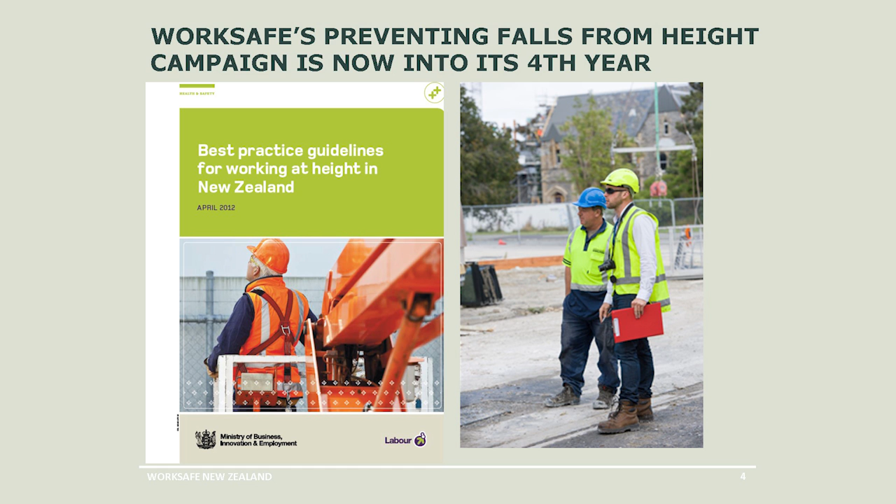So just a little bit of brief on why we are here and how we came to be. The Falls from Heights campaign is now in its 4th year. You're aware that there's a Falls from Heights campaign that's been running? Excellent. And some perceive this as a focus in the residential sector and a good way to shake up builders, and I assure you it's not.

With the creation of WorkSafe and leading into that, the strategies around what is causing serious harm, what is causing serious deaths actually, and what can we do about it? And it stood out quite literally that people falling off stuff in construction, especially under the 3 metres, and I'm sure you're all very aware of the history, but that history and that message has been very current for the past couple of years, and scaffolding and edge protection seems to be one of the preferred controls for these safe working at heights.

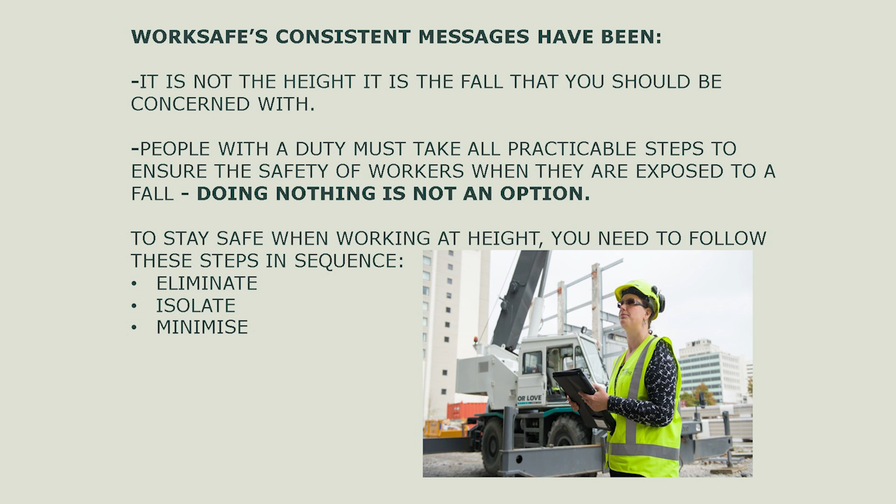No longer is it acceptable to say I'm wearing a harness and a harness system that is inappropriate. The emphasis is not on getting scaffolding. No one's telling you to get scaffolding. That's not the point at all. The emphasis is on, can you eliminate this harm? Can you isolate the risk and the hazard? And if not, can you minimise? Hang on. Go back to that isolate again.

And the preferred method of isolate, guardrails and scaffolding seems to speak for itself, and we're talking countrywide. This is a catalyst. There's some really good examples of good practice going on in the city. There is so much going on in the city, but I assure you this is reflected nationally, which is another reason as to why we brought our inspectors here. So let's go back to that isolate as to how you're controlling these hazards.

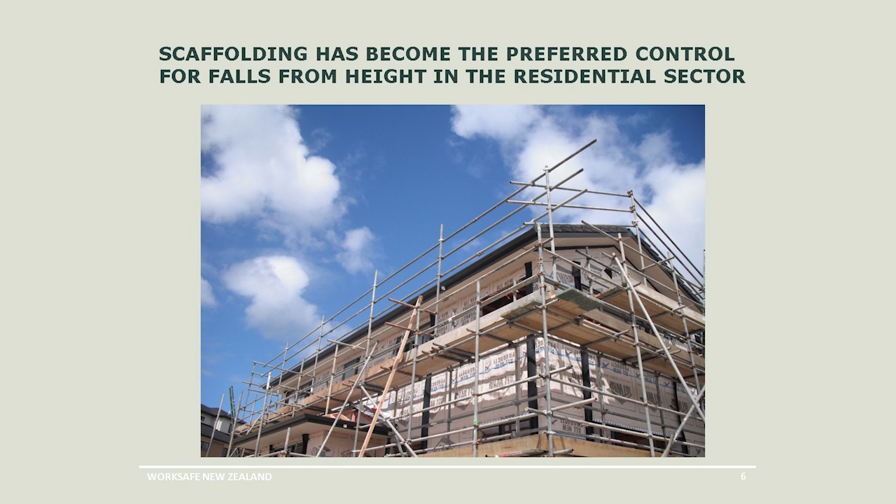I'm going to speak briefly on the responsibilities of the scaffolding supplier and then the responsibilities of those scaffold workers. And it's not just scaffolding, sorry for using that word, this is edge protection, guard railing. So we fit under that same umbrella. And hopefully at the end of this evening too, you'll get clarity on some of these grey areas in between what is scaffolding, what is guard railing, what is 25 degrees, what can I do, can I still wear a harness in some instances.

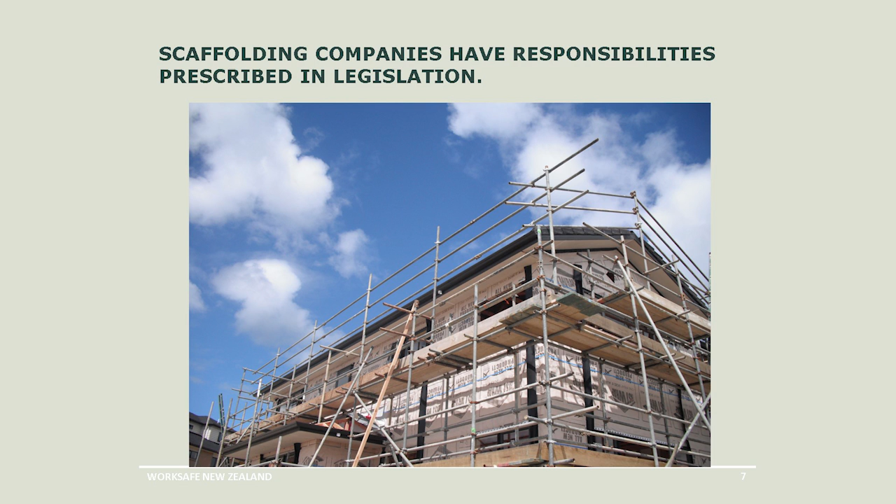Scaffolding and working at height is slightly unique in the sense that it's a trade or an industry that's regulated. So it's mentioned in the Act. Now that doesn't mean that if you're a scaffolding company or working at heights, you've got more responsibility under the Act. It's just those responsibilities are emphasised.

And you may want to know, and I should have checked this with Evgeny first because this might be an inside trade secret, but when our inspectors are talking to you about is that scaffold in good nick, generally they shouldn't be saying you need more planks on that, the handrail's the wrong height, or the distance off the wall's too far, because it should be linked back to the sections or the regulations of the Health and Safety in Employment Act. And this is quite literally one of them we use quite commonly, and it's a basic statement.

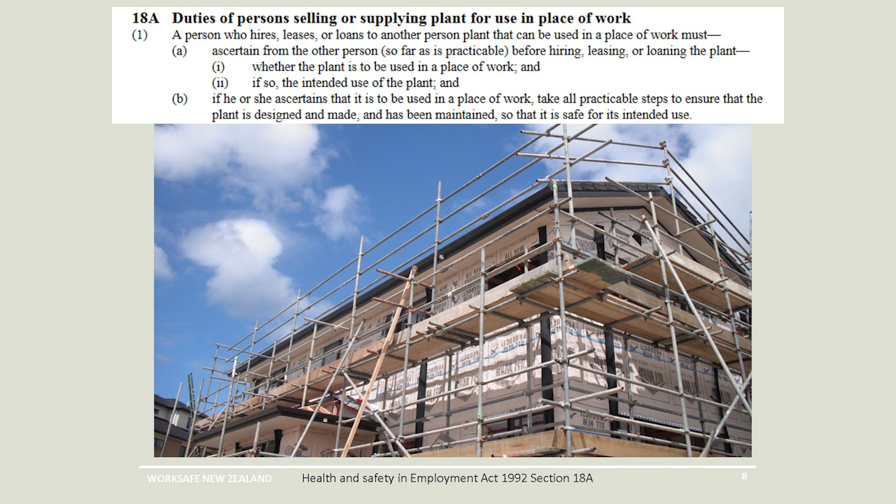Can you get that? I know it's a cut and paste, but pretty much if you're supplying plant or material to someone on a construction site, you need to make sure that that's in good nick, that it's right for the job, and the person using it understands it. And that's black and white legislation, and whether you know the legislation or not, you might be familiar with terms from the best practice guidelines. So taking the best practice guidelines, now interpretation of that actual section of the Act.

So just to reiterate, you're not going to be jumped on for not having sole boards under your standards when you should have sole boards under your standards, or your kick boards not in place. You're going to be challenged under the fact that you've supplied something. There's clear industry guidance on how it should be supplied, and we think you should be doing a better job of it.

The best practice guidelines for scaffolding interpret that message as you must develop a clear understanding of what's required. And that may even mean a communication to the person who's paying you, of course, because that's your main responsibility, but also the fact that the build changes on a daily, weekly basis, and that other trades may also need to use that. I'm forever getting phone calls from the Roofing Association, the poor bricklayers and the fascia guy. He whinges about that fascia guy.

So I'm getting phone calls from those guys about, hey, hang on, at the planning stage, a lot of these issues could have probably been ironed out given the responsibility to alter the scaffold fit for purpose and such. I'm not saying if you've been asked to build a scaffold for exterior cladding, we're going to force you to build a scaffold for the chimney out of masonry stone. That's not it at all. You build the scaffold for the contract, but you need to take into account that other trades might be using it, and those responsibilities are there in the communication stage with the principal.

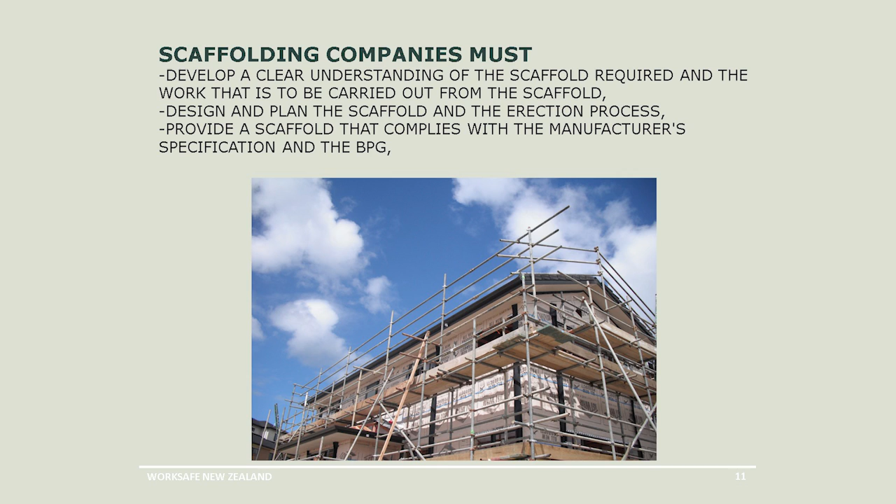Providing a scaffold that meets the manufacturer's specifications and the best practice guidelines. And so that's about the industry's expectations. You're familiar with the best practice guidelines in scaffolding, the best practice guidelines for roofing and such? Good as gold. They're industry created documents, and I think it's important that you're aware of them. We do endorse the practices, but they're not written by WorkSafe, and they shouldn't be. They're written by the industry, and it's industry's expectations on what safe looks like. So it's quite important that you're familiar with that or working towards that.

And the other good thing about it is it's what our inspectors carry. If you want to know what our inspectors are thinking, refer to the best practice guidelines, because we should be referring to what industry's expectations are. So we also use those best practice guidelines to measure and gauge what's going on.

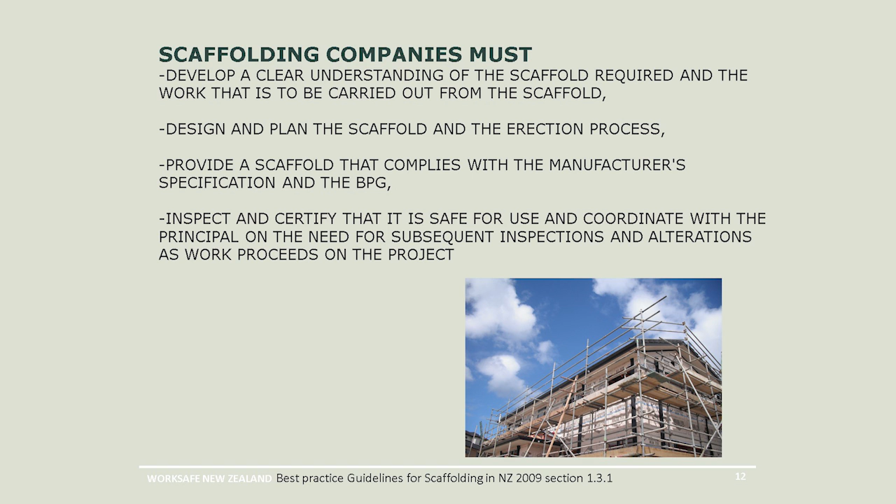Inspect it and make sure it's in good condition. Now, I know there's some grey areas in and around this 5 metres and who should tag and who can. I'm happy to clarify those or put our point across, but regardless of height, residential, 5 metres or over, scaffolding needs to be in good nick and maintained in good nick, and it's your responsibility, unless, of course, you've handed over that responsibility. You need to ensure that once the scaffold's been built, it's safe and compliant, and when you leave it, safe and compliant, by whatever means, and ensure that there's a process there.

Now, this scaffold could be there for 1 month, it could be there for 1 week, and it could be used by different trades, so whatever process you're going through, regardless of height, when a user uses it, they know it's safe. When an alteration happens, they know it's safe. And just as importantly, but least importantly, when an inspector comes across it, they know it's been put in a safe condition.

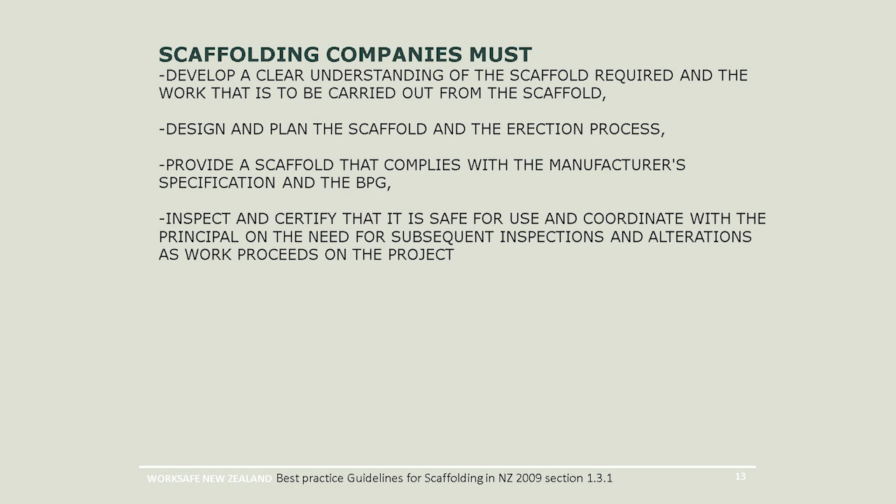No worries with that. These are from the best practice guidelines, and just reiterating that under the Act, scaffolding and working at height is mentioned, and this is the interpretation through the industry best practice guidelines. Cool. So scaffolders must. Now, what I've taken here is Regulation 35 out of the Health and Safety in Employment Act. So this is black and white.

This is specific to getting a certificate of competence. Now, if you're going to get a certificate of competence, these are the sort of traits you should demonstrate. But at the same time, these are the sorts of measures we apply to anyone building a scaffold. Okay? Scaffolders must have a thorough knowledge of scaffolding. That sort of makes sense, doesn't it?

Yeah. We're happy to guide. Absolutely happy to guide. Some of our inspectors aren't experts, and they don't need to be experts. They know the general principles. They know the dog's balls of what looks safe. They're happy to share what we're thinking. But at the end of the day, the expectation is on you to have that knowledge of the scaffolding.

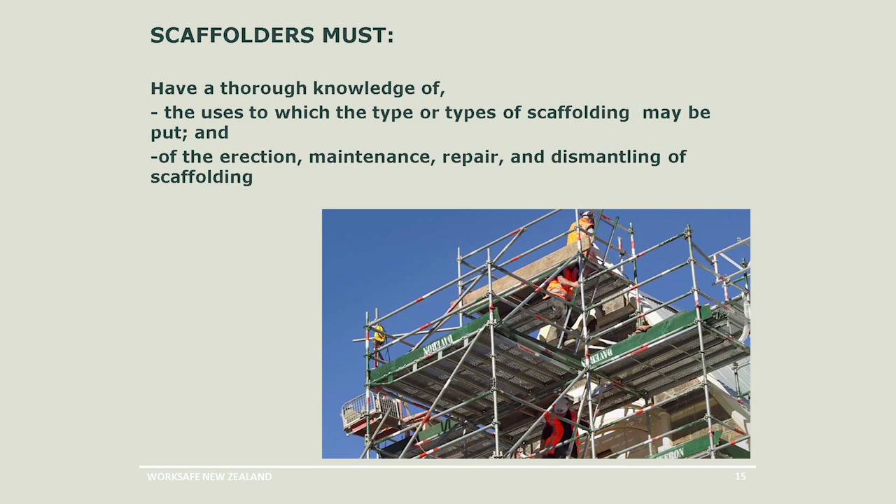The scaffolding company, the scaffolder, the team leader, the person taking responsibility for that build, must have a clear understanding of the erection process, the maintenance process, and of course the dismantling of a scaffold, and the practices, so safe work methods.

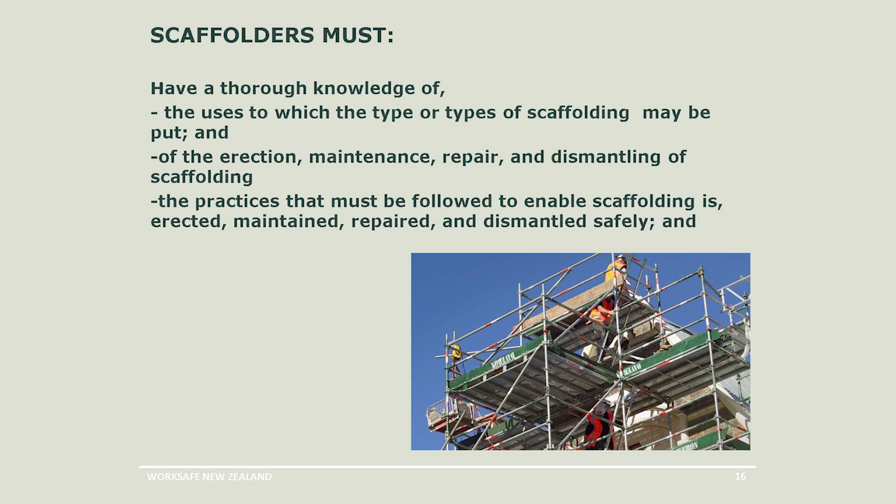And it's an interesting position I have now, because I'm privy to all sorts of groups and stuff, and as a scaffolder it was like everyone else's fault, you know, I'm a scaffolder, mate, that's how it is. But it seems to be now that we get this Falls from Heights campaign, there's greater awareness of the concerns and the harms, the social factors involved in an accident, the greater efficiencies and productivities of having a good scaffold or working from behind a rail.

You know, the Roofing Association is just wagging their tail about this whole campaign because it now means that roofers are working more efficiently. I don't know if they work happier, but they are a happy bunch. But instead of having harnesses that weren't really tied to anything, and doing courses that really didn't help them in the job they're doing, they've now got rails around them and even better ladders and platforms and stuff. So there's been some really good energy behind this campaign and this focus.

So it's a bit disappointing when, and present company excluded, of course, I know he's here, when builders ring up and say, you know what, I took your advice and I invested a few thousand dollars in getting a scaffolding company in, and it's brilliant, it's well worth it. My boys love it. In fact, for the next build, we're going to factor it in. But I'm a bit concerned that the things we can't do, like walk the top plate or walk the trusses or climb purlins, these scaffolders are doing that.

What's that about? Now, our main emphasis is quite literally, let's get some scaffolding and edge protection or better systems in place. And we've still got a lot of work to do in that place. Should we really be coming back and talking to the industry whose responsibility it is to make that happen, and say, look, how are you guys working? What are you guys doing about it? It's not a good look and it's not a good fit, but the expectation is scaffolders should be able to, from very low to very high, keep themselves and their team safe and demonstrate good practice and work as tradesmen or tradeswomen.

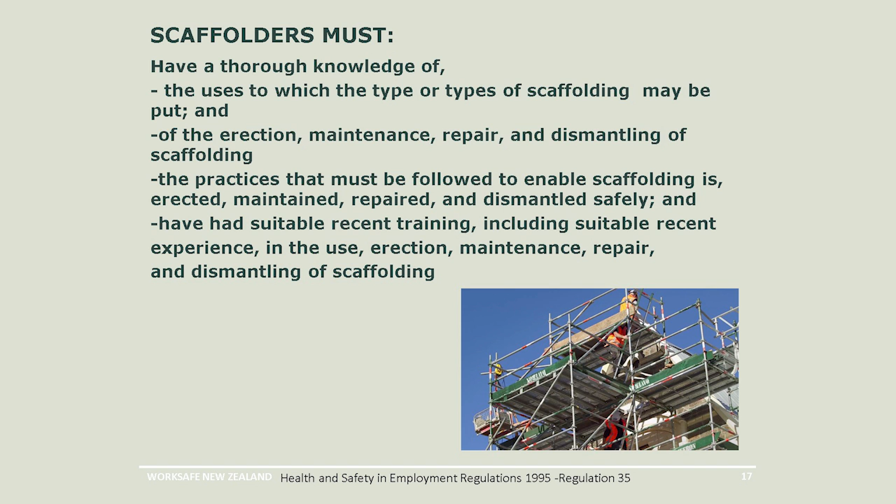Have had suitable recent training. Now this is a requirement to get a certificate of competence, and you must have one if you're building a scaffold over 5 metres. Have had recent training and experience and knowledge, but at the same time, if under 5 metres and you don't have to be a certified scaffolder, we should be asking those same questions. Do you know what you're doing? Who is this for? Who's going to take charge of it when you're not here? Who's taking those planks off? So these are the same questions we'd ask regardless.

So there is no height with us, and it's not a height thing at all. It's not how far you fall, it's how you fall and what you land on. And it seems to be that the residential sector, especially in Christchurch, has benefited from the efficiencies of these scaffolding and these guardrails. Oh no, I'm supposed to delete that one.